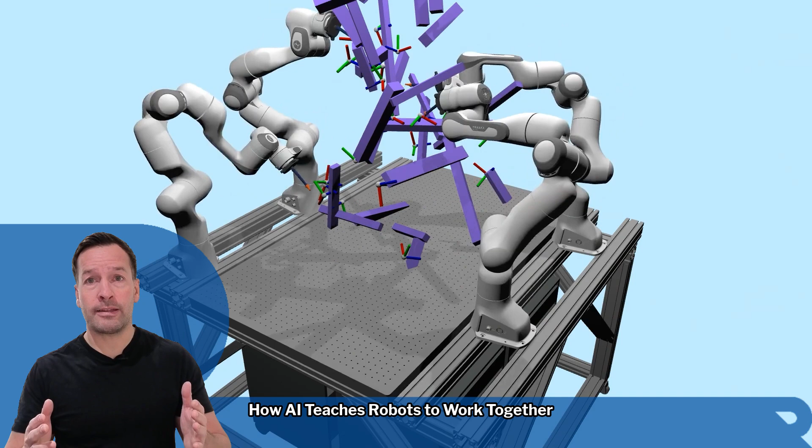Picture a group of robots working side by side, moving smoothly without bumping into each other. No crashes, no awkward pauses, just well-coordinated teamwork. That's the idea behind RoboBallet.

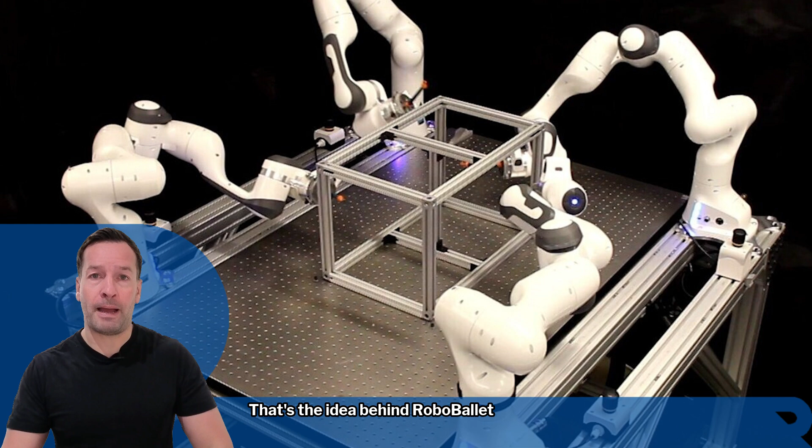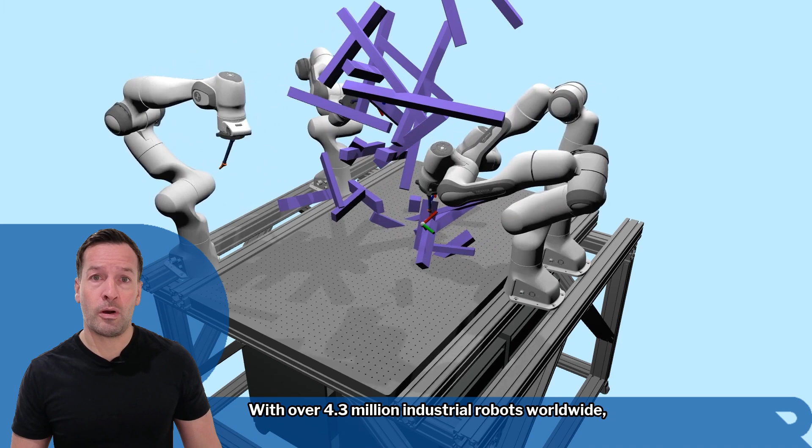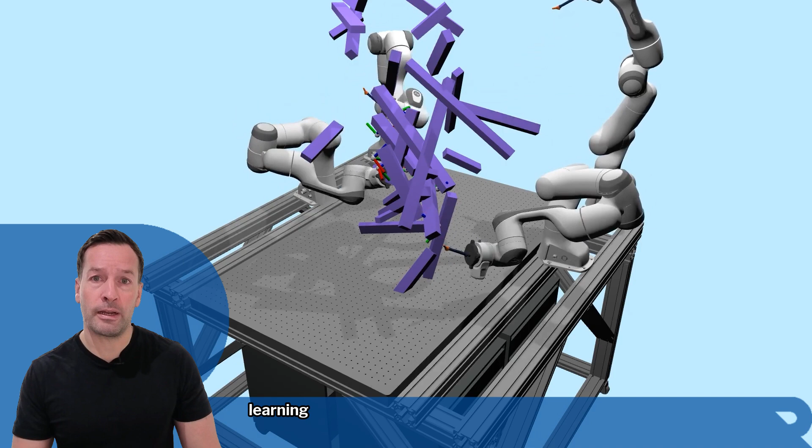Programming a single industrial robot is already complex, relying on teach pendants, offline tools, and plenty of trial and error. Now try synchronizing several robots in one shared space. With over 4.3 million industrial robots worldwide, the time and effort required for programming is a real barrier to scaling automation. Researchers from Google DeepMind Robotics, Intrinsic and UCL have developed RoboBallet, an AI system that uses graph neural networks and reinforcement learning to generate collision-free plans for multiple robots.

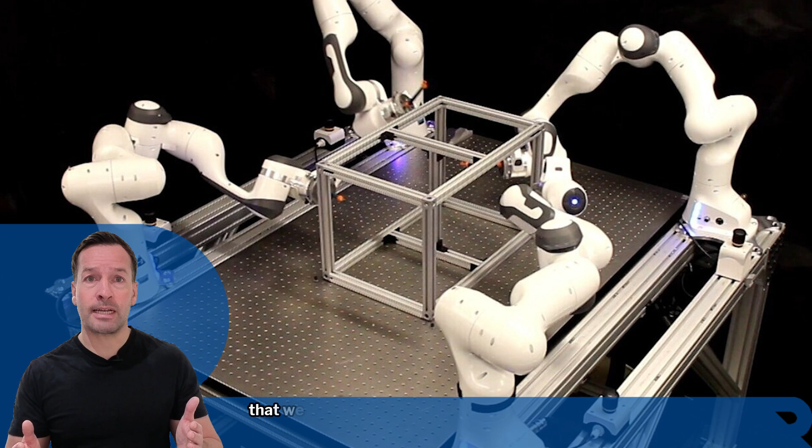Instead of painstaking coding, it just needs a CAD file and a task list. In tests, the systems coordinated up to 8 robots within seconds, producing plans that were about 25% more efficient than traditional methods. And interestingly, as the number of robots increased, task execution times actually dropped by 60%.

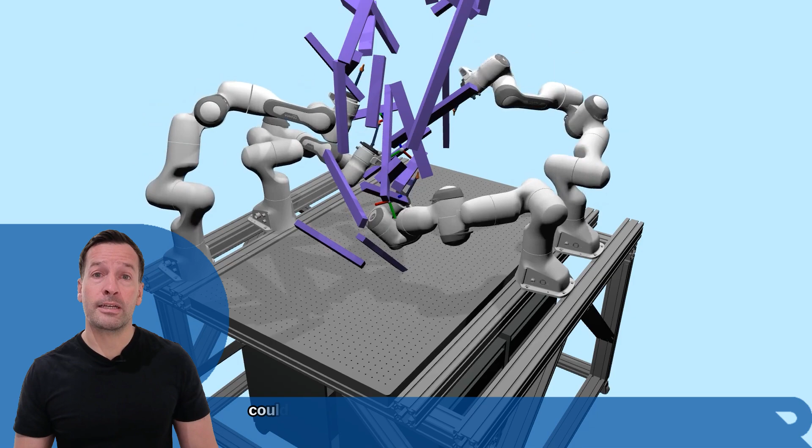The name comes from its choreograph-like approach. The AI finds harmony between robots' timing, space and flow, turning what used to be a complex scheduling puzzle into a smooth routine. Looking forward, this kind of planning could let factories adapt on the fly to design changes or unexpected events, reducing downtime and increasing flexibility.

RoboBallet shows that when robots learn to work together gracefully, automation becomes faster, safer, and far easier to scale.

And that's your robot news update for today.